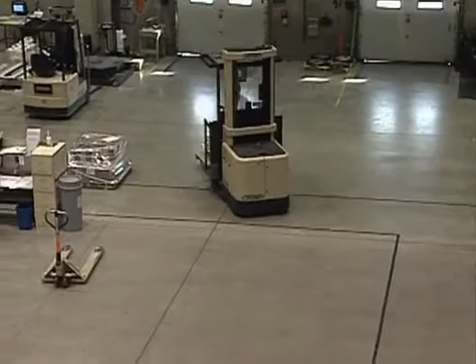The forklift provides the support companies need to easily and efficiently complete large tasks and move the heaviest loads. In the hands of an unskilled operator, however, a forklift can be dangerous. Without proper training on safe operation, an operator is a potential hazard to themselves as well as every employee around them.

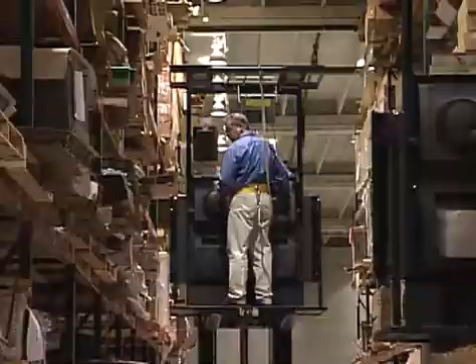This video is part of a comprehensive training program designed to help you become an authorized forklift operator within your company. The information you learn, along with your hands-on training, will help keep you and your coworkers safe from harm while working with these machines.

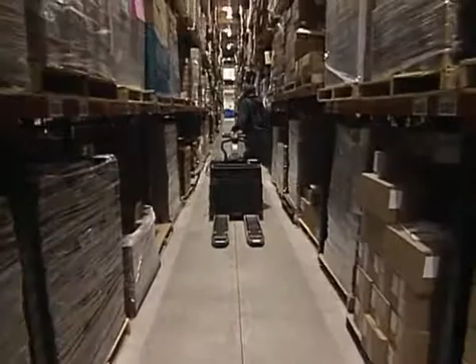During your employment as a forklift operator, you will be required to undergo refresher training every now and then as equipment is replaced or upgraded. This is in addition to a required performance evaluation that will occur at least once every 3 years. These safety reviews, together with what you learn today, the experience you gain through your daily employment, and your adherence to the equipment operation rules of your company will ensure that you are always operating your forklift in the safest way possible.

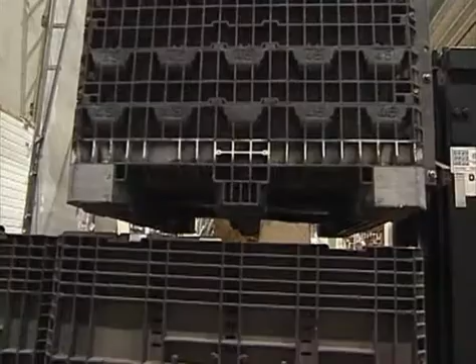Many people mistakenly think that because they know how to operate other types of machinery, such as a car or skid loader, they can operate a forklift. This isn't necessarily the case.

Answer the following questions to see how well you understand operational basics for a forklift. A forklift drives just like an automobile. True or false?

The counterweight on the rear of a forklift will help prevent a forklift from tipping over. True or false?

A forklift is so heavy, it is only in danger of tipping over when carrying a load. True or false?

To answer these, and perhaps some additional questions you may have, let's follow Andy on his first day on the job as a forklift operator. Frank, Andy's supervisor, is walking him through the key elements of safe, effective forklift operation.

Andy, good to see you again. Welcome aboard. Thanks a lot. So, everything going well for you so far? Yeah, good. Good. As you can see, we got a lot of things going on around here. We want to get you up to speed as quickly as possible.

So tell me, have you ever driven a forklift before? No, but I have a pretty good idea on what to do. I used to do construction with my dad's company and operate skid loaders and other machinery and stuff, so I should be fine. I can understand where you might think that way, but forklift operation isn't quite that simple. We got a lot of ground to cover before you become a forklift operator, so let's take a walk.

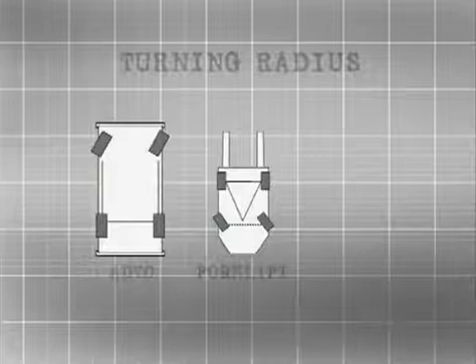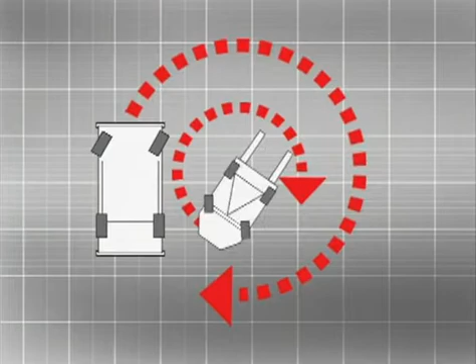Another very important difference between a forklift and an automobile is that an automobile will use its front wheels to determine its direction, whereas a forklift will use its rear wheels for steering. This is important because that allows a forklift a very tight turning radius, but it also causes the rear section to swing out. If you're traveling at an unsafe rate of speed, that swing in the rear section may become greater than you anticipate, thus hitting materials and/or a pedestrian if that swing becomes uncontrollable.

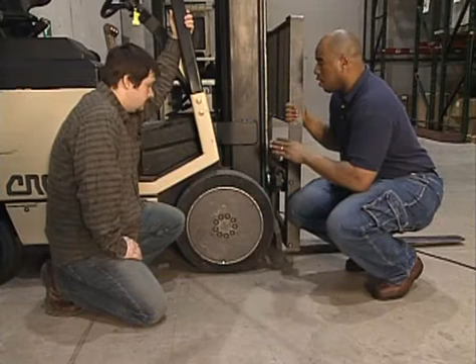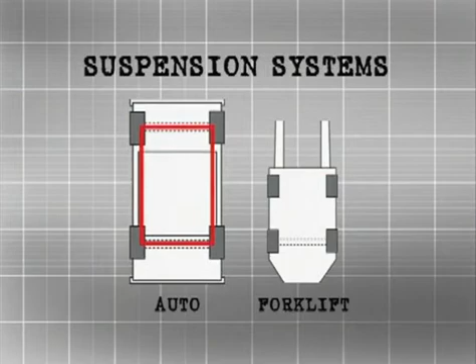Another important difference is in the suspension. A car's suspension smooths out the bumps in the road and allows it to navigate through turns, creating a smooth ride. A car uses a 4-point suspension, whereas a forklift uses a 3-point suspension, creating a clear difference in how the two machines operate. How so? It's really quite simple, actually.

A car's suspension system is a 4-point suspension system, creating a rectangle. This allows for even distribution of weight even if the car is accelerating, maneuvering, or braking. A forklift suspension system is a 3-point suspension system: 1 point at the front left wheel, 1 point at the front right wheel, and 1 point in the middle of the rear wheel axle, creating a stability triangle.

Wait, stability triangle. What is it? The stability triangle is a theoretical triangle formed by the forklift suspension system. It's important to remember because as long as the forklift's center of gravity remains within that triangle, the forklift won't tip over, whether carrying a load or just moving from place to place.

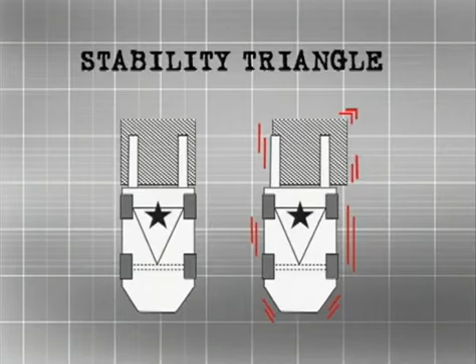Center of gravity is the balancing point of an object. Think of it this way: if you were pedaling a tricycle around a corner and moved your weight, or center of gravity, to the narrowest part of the triangle, you'd be very likely to tip over. But if you moved your center of gravity to the widest part of the triangle, you'd be far less likely to tip over.

But how do you find your center of gravity? Well, the center of gravity is determined by the load you're carrying. Let me show you. The first thing you need to do when determining the maximum load capacity of the forklift...

...is find the identification plate. Every forklift manufacturer puts one of these on their machines. The identification plate contains valuable information, such as engine specifications, serial number, weight of the forklift, type designation, and maximum load capacity.

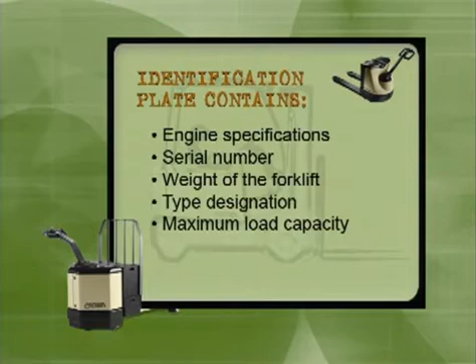The maximum load capacity is how much the forklift can safely carry, but this isn't the only factor in determining the center of gravity. When the forklift is unloaded, the center of gravity is in the middle of the forklift. When properly loaded, the center of gravity moves slightly forward because the load and counterweight work together. But if the forklift becomes overloaded, the center of gravity moves outside the stability triangle and the forklift becomes unstable.

Wow. What do I need to do so that doesn't happen? Remember to take into account the load's weight, height, and position when determining whether it will be safe to lift and carry. A forklift's center of gravity will also shift when accelerating, braking, or turning.

So it's important to always drive at a safe speed and avoid sudden maneuvers. Also, always make sure you're aware of the conditions of your driving surface. Due to the truck's 3-point suspension, even a relatively small change in surface conditions, such as a pothole, can pose a hazard, shift the center of gravity, and cause the forklift to tip over in transit.

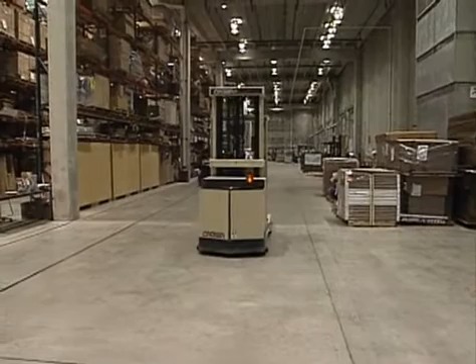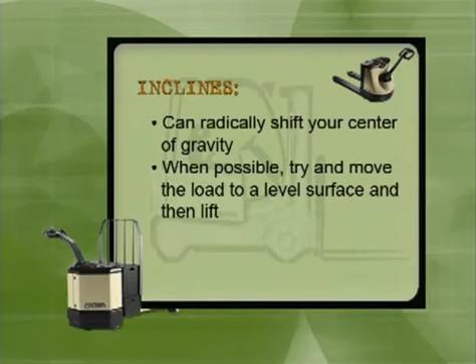When working on an incline, you must be especially careful, as picking up loads on inclines, even ones that aren't steep, can radically shift your center of gravity. Whenever possible, try to move the load to a level surface and then lift, to avoid a possible tip over.

Now, I only have to be concerned with the center of gravity when I'm carrying a load, right? Go ahead and have a seat. Actually, that's not necessarily true. The vehicle's counterweight system still affects the vehicle even if you're not carrying a load. This is especially true when making turns or moving from location to location. You still need to be concerned with the center of gravity.

Sounds good. So am I ready to drive then? Not quite yet. Before you drive a vehicle, you want to complete a pre-operation inspection form. While this form isn't mandatory at all job sites, we like to use it to make us aware of any maintenance issues that may occur before you drive the vehicle.

With this form, you want to look at some very specific areas of the vehicle's operation, such as fluid levels, accelerator, brakes, hydraulic controls, lights, and tires. And if you find a problem with any of these areas, you want to make your immediate supervisor aware as quickly as possible so repairs can be done before you operate the vehicle.

Sound good? Yeah, I had no idea so much went into operating a forklift before you even started driving. Absolutely. Here you go.

You can safely operate a forklift from outside the driver's seat. True or false?

If a forklift is in danger of tipping over, you should jump out of the driver's seat to safety. True or false?

When driving a forklift, it's safest to keep the forks as high as possible. True or false?

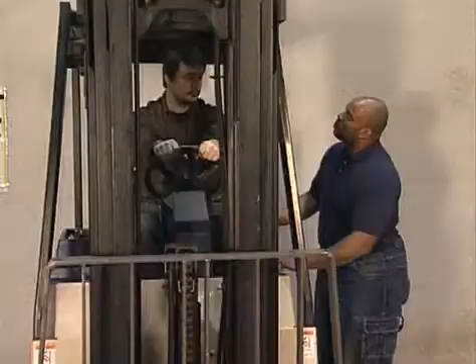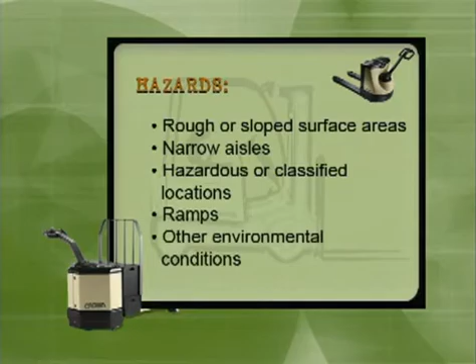Not quite. Before moving, you need to check the road for any hazardous conditions, such as rough or sloped surface areas, narrow aisles which may restrict your maneuverability or vision, hazardous or classified areas that may be contained within your route, any ramps or other environmental conditions within your work area. Okay, so check the conditions of my route, seatbelt, 3 points of contact.

Got it. Okay, why don't you hop down and let's take a look at the forks. Before you move the forklift, you want to make sure the forks are at the proper operating height, which is about 2 to 4 inches from the ground. That's so you don't run into any materials, lights, or low-hanging pipes.

But you also need to remember that if along your route there are any sloped, rough, or uneven surfaces, you need to be able to adjust your forks so that the load doesn't shift or potentially fall off. Also remember, never have anyone walk underneath the forks, even if they're unloaded, because this potentially could cause a hazard or an injury.

Also, don't have anyone grab on or hold on to the forklift. It could unbalance the forklift, or they could fall off and cause an injury. Got it, no free rides. That's right. Now let's take a look at some forklifts in operation and consider some other issues.

When working around pedestrians, forklift operators have the right-of-way. True or false?

When unloading from a semi-truck trailer, the truck driver only needs to set his emergency brakes and does not need to chock the wheels. True or false?

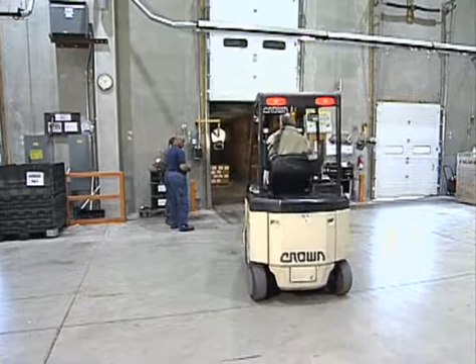That sounds like a good rule to me. Okay, now we're going to move on over here. You always want to make sure that the truck is secure. As you can see, he's about to drive the load across the dock board or bridge plate. The bridge plate is used for loading railroad cars, trailers, and such.

You always want to ensure that the truck is secured to the dock. You never want to rely on the truck driver for that information. You want to check it for your own safety, because if the dock plate or bridge plate were to fall, it could cause a serious injury. You should never rely on the truck driver or anyone else to make sure the trailer is secure. Check it yourself, for your own safety.

The operator is going to check the deck for any breaks or weaknesses. You should probably check the height of your load also, right? That's right, Andy. You should always check to see that there's sufficient clearance for any overhanging installations.

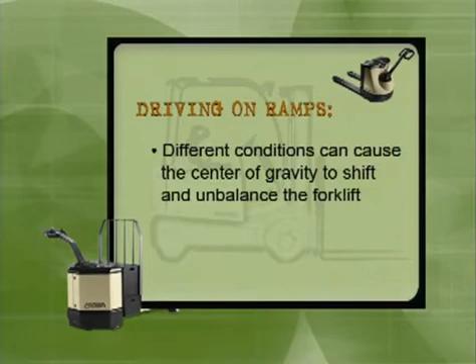One more point you should be aware of: when it comes to ramps, you should always drive with the load facing the incline of the ramp. This helps keep the forklift balanced. If you drive with the load facing the decline, it could fall or tip the forklift over. That's because the center of gravity can shift, right? Exactly. Just like we talked about, different conditions can cause the center of gravity to shift and unbalance the forklift, causing it to tip.

Now we're almost done, so let's go take a look at the loading process.

As long as the weight of a load does not exceed a forklift's capacity, it is always safe to lift. True or false? If a load obstructs your view, it is best to drive in reverse with the load trailing. True or false?

Hi, Sam. Oh, hey, Frank. Hey, this here's Andy. He's going to be joining our team. Today is his first day. Oh, hi, Andy. Nice to meet you. Welcome. So you're going through your training today? Yeah, but really I'm ready to drive one of these things. I know what you mean, but this training's important. Absolutely. Sam, can you show Andy what you're doing? Oh, sure. Okay. Come on.

Andy, transporting any load involves a certain amount of danger unless certain safety precautions are used. So before lifting any load, it's important to inspect it to ensure that it's stable and to see if any parts will fall off. Well, this one here looks pretty unstable. Yeah, it is. This load will have to be secured before it's safe to pick up.

Just because a load is within the weight capacity of the forklift doesn't necessarily mean that it's safe to lift. You can see that the weight of this load is off to the side and off center, and that could cause the forklift to tip. So this load will have to be balanced before it's safe to pick up. We've already prepared this load and ensured that it's stable, no materials will fall, and it won't throw off the weight balance during transport.

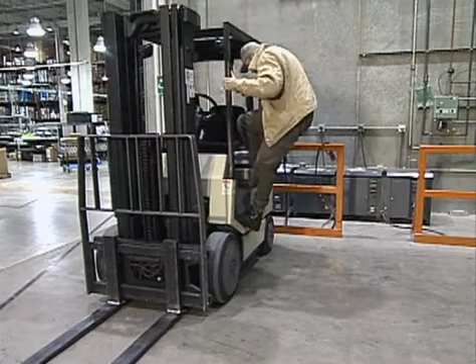Now set the brake to avoid any movement and then dismount using the 3 points of contact system. So: park in an authorized area, lower the forks, turn off the engine, remove the key, set the brake, and step down using the 3-point system. Exactly. Now, after you dismount, you want to inspect the vehicle to see if there have been any maintenance issues that may have occurred during operation. If you find that the vehicle is made unsafe during operation, notify your supervisor as soon as possible.

If you are authorized to operate a forklift, you are also authorized to refuel or recharge it. True or false?

Refueling or recharging must take place in a designated area. True or false?

Now we've covered general concepts of forklift operation, pre-operation inspection, pedestrian safety, dock and ramp precautions, loading procedures, and post-operation duties. Well, that looks like just about everything, so am I ready to drive now?

How are you going to drive your vehicle if it isn't powered? Come on, we're going to talk about batteries and fueling. Different forklifts operate on different types of power. Some use batteries while others run on fuel.

We'll cover batteries first. The first rule is never attempt to remove a battery unless you've been trained and authorized to do so. Batteries are filled with acid to maintain their charge and can be very dangerous. You should only change the battery in a designated area to reduce the risk of injury.

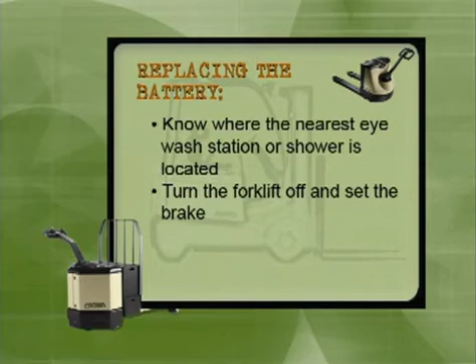When you're ready to change the battery, turn the forklift off and set the brake. Make sure the battery is secured before lifting it out. Stand clear and remove the battery using a conveyor, overhead hoist, or other machine designed for this purpose. When placing the new battery in, make sure it's properly positioned and secured before starting the machine again.

Can these batteries be charged? Certainly they can, and the process is relatively simple. But like everything else we've talked about, you need to follow the proper safety precautions.

First of all, you want to wear your safety goggles. Then you want to pull your forklift into the proper position, making sure that the brake is set and the forks are down. You also want to make sure that the ventilation system is working within the battery charging area.

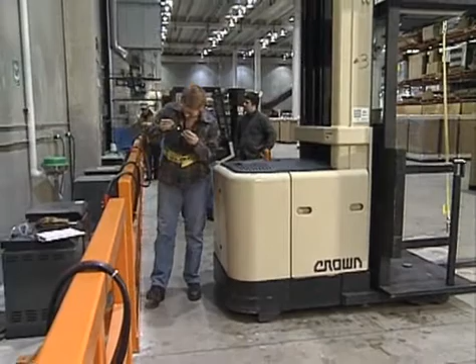Now, if you're charging the battery on the forklift, you want to open up the battery compartment to release any buildup of heat or hydrogen gas. You want to make sure that the vent caps are uncovered and the battery caps are open to release any heat. Also, make sure that the charger is off before plugging in.

Now, you want to plug in using the proper polarity, black to negative, red to positive. And if any electrolyte is by chance spilled, you want to follow your company's proper safety procedures for cleaning up that spill.

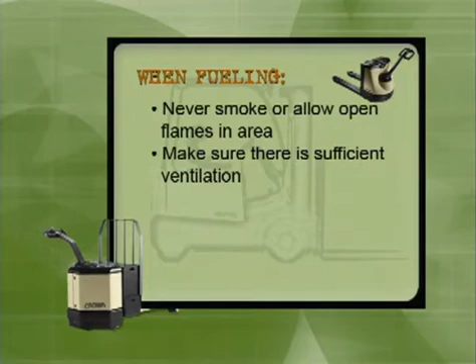For those machines that run on fuel, there are a few things to keep in mind. First, never smoke or allow open flames or any equipment that generates sparks in the refueling area. Second, always make sure there is sufficient ventilation in the area. Third, make sure there is a fire extinguisher nearby. And lastly, make sure there is a barrier that protects the pump against vehicle damage.

Well, Andy, I think that about covers it. So, now? Now you're ready to drive. All right.

A forklift drives just like an automobile. False. The counterweight on the rear of a forklift will help prevent a forklift from tipping over. True. A forklift is so heavy, it is only in danger of tipping over when carrying a load. False. You can safely operate a forklift from outside the driver's seat. False.

If a forklift is in danger of tipping over, you should jump out of the driver's seat to safety. False. When driving a forklift, it's safest to keep the forks as high as possible. False.

When working around pedestrians, forklift operators have the right-of-way. False. When unloading from a semi-truck trailer, the truck driver only needs to set his emergency brakes and does not need to chock the wheels. False.

As long as the weight of a load does not exceed a forklift's capacity, it is always safe to lift. False. If a load obstructs your view, it is best to drive in reverse with the load trailing. True.